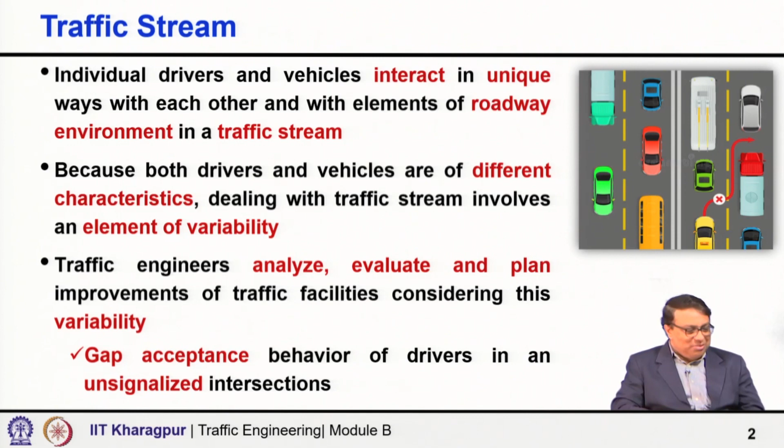Obviously, as the gap is higher, more and more drivers are likely to accept it and fewer drivers are going to reject it. Similarly, as the gap becomes lower, more and more drivers are probably going to reject it and fewer drivers are going to accept it. But given a gap, not 100% of drivers are going to accept that gap, nor 100% are going to reject it. So, the variability comes into picture; not every driver is going to behave in the same manner.

Now, there are fundamentally two types of traffic facilities. One is called uninterrupted flow facilities and the other is called interrupted flow facilities. Please be careful, because students often make mistakes in the fundamental understanding of the basic difference between uninterrupted and interrupted flow facilities. In uninterrupted flow facilities, there are no interruptions external to the traffic stream. What is external to the traffic stream?

If I install a traffic signal to regulate traffic, when the signal is green, the vehicle will pass. When the signal is red, the vehicle has to stop. Or if you are approaching from a minor street trying to enter a major highway or higher order road, and you find a stop sign, you have to stop and then look for suitable gaps. Once you find the suitable gap, you do the maneuver, but stopping is mandatory. Similarly, with yield signs, you have to slow down, and if required, stop when you are trying to enter. These are external reasons for interruption to the movement of vehicles.

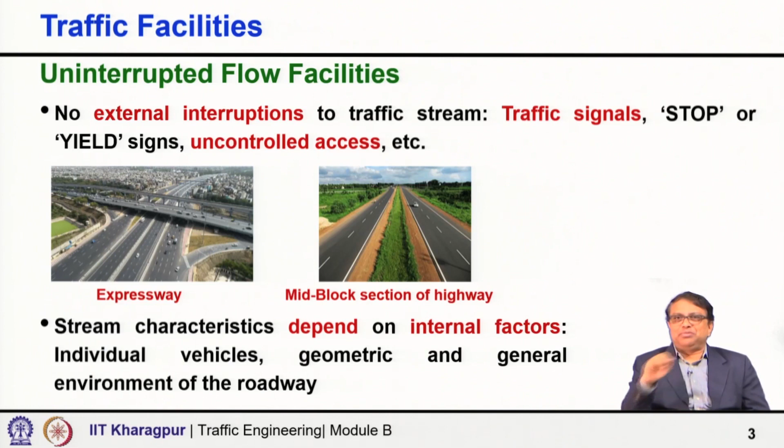Stream characteristics for uninterrupted flow facilities depend on internal factors, as I have said: individual vehicles, their characteristics, driver characteristics, geometric and general environment of the roadway. All this will influence the stream characteristics, but not external interruption. That is the key.

Going to interrupted flow facilities, traffic flow is interrupted due to external factors by external devices, and typically the flow is periodically interrupted by external devices, particularly traffic signals in the urban road network. If you consider urban facilities, all are largely interrupted facilities, because most of the intersections in large urban areas are controlled by traffic signals. So, periodically interrupted by external devices.

Why do I say periodically interrupted? Because when the signal is green, vehicles are passing, moving. When the signal is red, vehicles have to stop, and periodically it is happening: green, red, green, red. So, periodically vehicles are moving and stopping, moving and stopping. And also when stop or yield signs are present, the facility will be treated as an interrupted flow facility.

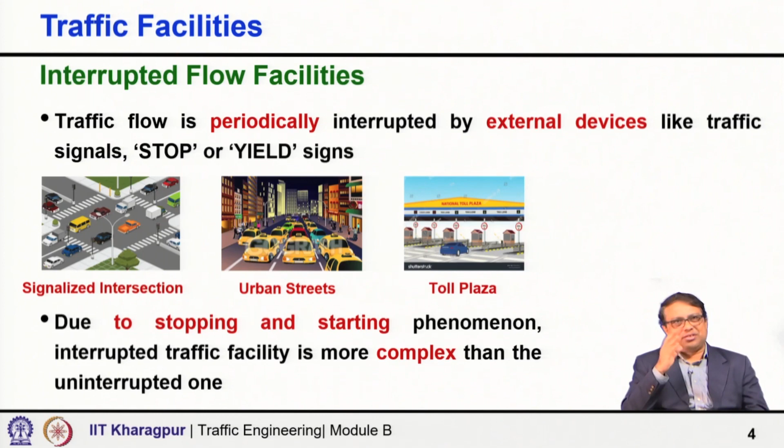So, examples I have said: signalized intersections, urban streets, even toll plazas where the vehicle has to stop and pay the toll. These are all interrupted flow facilities. Now, due to the stopping and starting phenomenon, an interrupted traffic facility is more complex than the uninterrupted one. We shall discuss in further detail the various characteristics of these uninterrupted and interrupted flow facilities.

Coming to next, the traffic stream parameters. There are two types of parameters we deal with. One we call macroscopic parameters, the other we call microscopic. By the names micro and macro, you can understand what we are trying to indicate. Macroscopic means at a gross level, in an overall sense. So, for the whole traffic stream, we are giving one value of the parameter. For example, one speed for the whole traffic stream, one value of the flow, one value of the overall density. These are all called macroscopic parameters.

They are macroscopic because these parameters describe the traffic stream as a whole, and for the whole traffic stream there is one value. Through one value we are representing the traffic stream characteristics. On the other hand, microscopic parameters concern the individual characteristics of vehicles or sometimes pairs of vehicles. For example, individual vehicle characteristics could be speed and acceleration of individual vehicles. They are all individual vehicle specific characteristics.

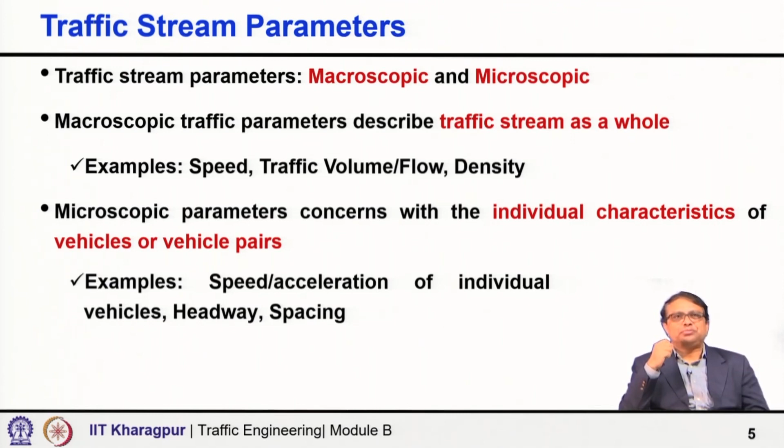Now, macroscopic speed characteristics, if we try to look into a little bit more detail: vehicle groups passing a point or short segment, it could be a point, it could be a short segment that we are also considering almost like a point, during a specified period of time, or travelling along long sections of highway, that means over a length. So, the speed we are trying to characterize, trying to define, is for vehicle groups which are passing a point or short segment during a specified period of time, or over a distance, over a relatively longer section.

Now, speed is considered to be a fundamental measure of traffic performance in a highway system, and also is a key indicator in design or redesign of traffic facilities. Any geometric design of roads starts with the basic input, which is speed. What should be the design speed? So, every element of design is actually done with the design speed in mind. So, a very important parameter. And speed is usually also an input in simulation models.

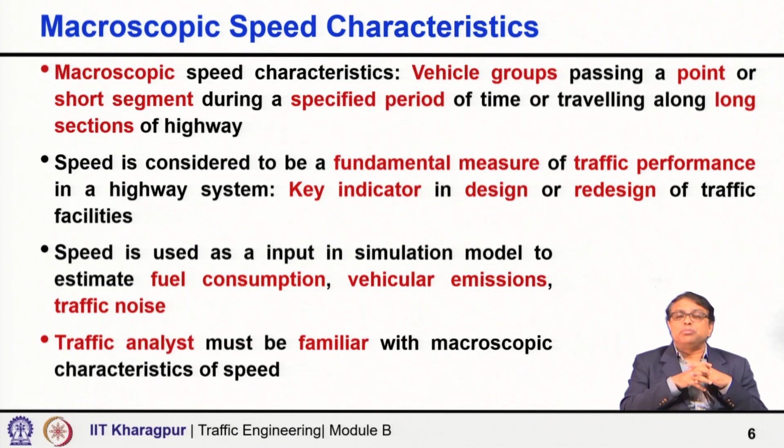We often develop micro simulation models in traffic because of this variability element; to take that into consideration and to analyze complex situations, we often use traffic micro simulation. So, speed is a vital input, and we use such simulation models for estimation of fuel consumption, vehicular emission, traffic noise, and all such things. Traffic analysts must be familiar with microscopic and macroscopic characteristics of speed.

Speed varies. It is not a fixed value; it varies in 3 dimensions or 3 manners. Over the temporal scale, that means over time, and over space, which in this case specifically means location. So, at different locations of the road, speed may be different. At different times, same location, speed may be different. So, 3 types of variation: temporal, spatial, and also modal variation. The same road facility is used by many different types of vehicles, so different vehicle types will have different speeds. A car, a truck, a bus are not going to have the same speed.

Coming to temporal variations, speed varies over time and is influenced by several factors, which we can classify as primary and secondary influencing factors. The primary influencing factors are flow rate or flow to capacity ratio, basically the demand. Any road is a physical infrastructure with a capacity, and the more we load the facility, the more the freedom of movement will be compromised, and obviously, as flow rate gets higher, speed is going to come down.

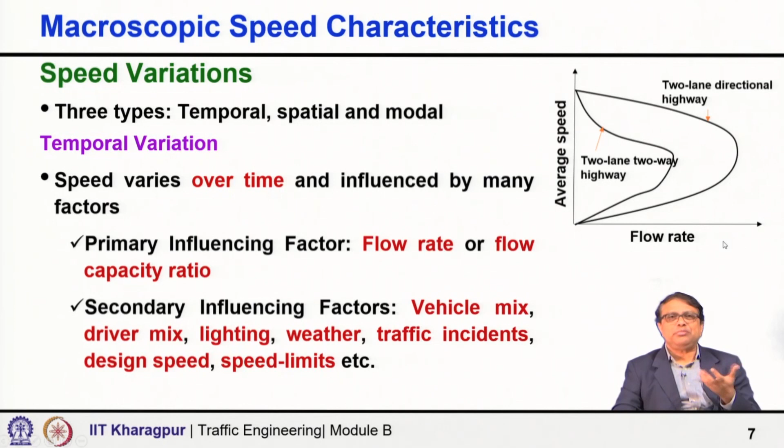And here, as I have shown here, two curves, one for 2-lane directional highway, another is 2-lane two-way highway. Obviously, you can see the maximum flow rate shown here is lower when it is a 2-lane two-way highway. So, that means how much traffic load this 2-lane two-way road can take, the 2-lane directional highway, or if there are even higher order facilities, directional can take even much higher. That is what is shown here.

Speed varies over location, that is what I am saying as spatial variation. So, speed varies transversely across highway and also longitudinally along the highway and also direction wise. Why I say that it varies transversely across the highway? In our case, sometimes things are not really orderly, but if you see the lane wise traffic distribution, ideally the slow moving should be on the left side in the Indian scenario, which is left hand driving, what we follow in India.

So, the slow moving, then the higher speed, maybe the middle lane, if it is 3 plus 3. So, I am talking 6-lane highway, 3 lanes in each direction, and the rightmost lane should be for the fastest vehicle. So, any vehicle you want to overtake, that means you want to travel at a higher speed than the vehicle in front, you should use the available right lane, complete the overtaking maneuver and come back.

So, naturally, in all the developed world also you will find that lane wise speed limits are there, because based on vehicle characteristics, based on driver characteristics, not every vehicle is going to travel at the same speed. Even if the design speed is higher, that does not mean that all vehicles will travel very fast. With a very good vehicle also I may like to travel slowly.

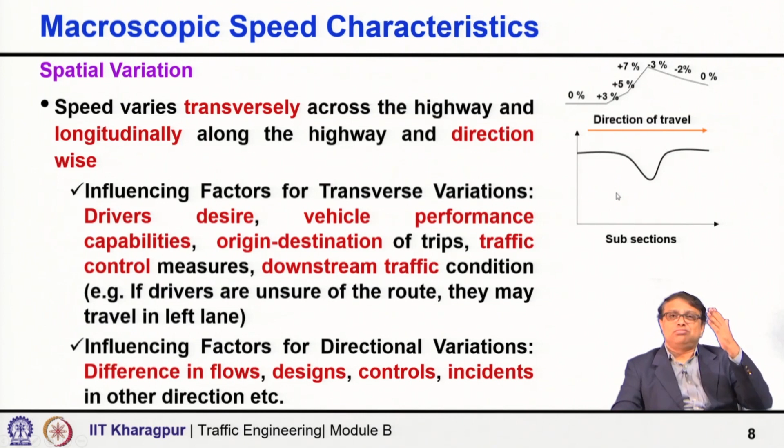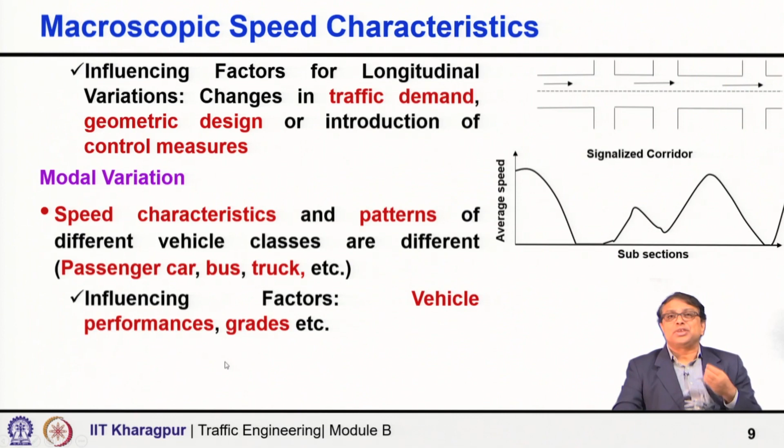Also, there is longitudinal variation along the length. I have shown it in the previous slide. The terrain may be different, the slope may be different. So, along the length of the road, or there could be in between some minor access or other things, the speed may vary. Modal variation also is there, as I have already said. The speed characteristics and pattern of different vehicle classes are different. For example, passenger car, bus, truck, they do not travel at the same speed. So, here the influencing factors may include vehicle performance, grades and all such things.

Now, it is important to understand the mean variance relationship. Why? Because there is an element of variability. That variability is part and parcel of traffic engineering. So, as speed variations are observed in the field, it is necessary to quantify mean and variance, and here we use the term called coefficient of variation, and it is a measure of dispersion and normalizes standard deviation.

So, how do we express CV, the coefficient of variation? It is S by mu. S is the standard deviation of the speed sample, and mu is the sample mean speed. So, you will see that there are different CV values, but different combinations of the standard deviation and sample mean may give you the same CV value.

So, I have shown different lines here. Here the CV is 0, that means the standard deviation is 0. And as you move in this direction anti-clockwise, the CV value becomes higher and higher. And any point on these lines shows that the same CV can come from different combinations of S and mu.

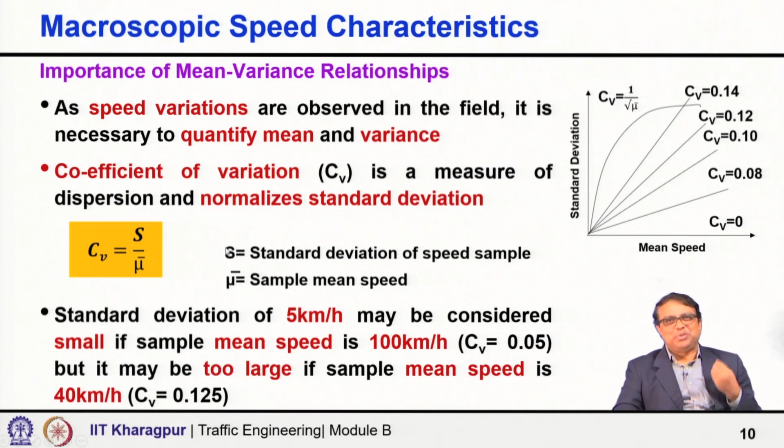So, it is not only the standard deviation, but standard deviation by mean, what we normally refer to as coefficient of variation, that is important. So, based on that we can judge. An analyst can estimate speed distribution by selecting an expected mean speed with a particular CV value to get the standard deviation and assuming a normal distribution. Speed varies, and we often express such variation using the normal distribution. Not that only the normal distribution is applicable, but often we assume it to be normally distributed.

Now, when we talk about average speed, there are two ways we can express speed. One is called time mean speed, the other is called space mean speed. Time mean speed is the average at one point or location over a period of time. So, at one location I have observed the speeds of multiple vehicles over a period of time, and mathematically it is the arithmetic mean of the speeds observed at a point.

On the other hand, the other expression of speed is called space mean speed. It is the average speed of vehicles occupying a certain road length over a period of time, and mathematically, if you express it, you will see that it is the harmonic mean of the speeds observed at a point.

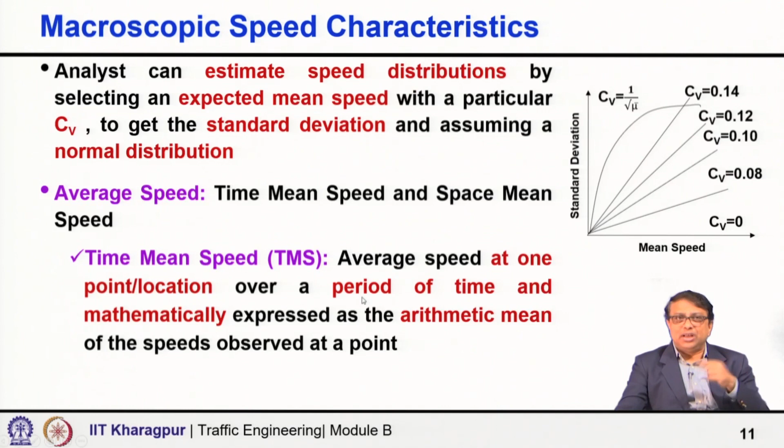So, I have shown here that 25 spot speed observations were made at a particular location. So, I have observed 25 vehicles and their speeds. So, what is the time mean speed? Time mean speed is the average of speeds measured over a period of time. So, I simply take the average, 50 plus 40 plus 60 and so on, divided by 25, and I get 49.56 kilometer per hour.

Now, suppose we consider each of these 25 vehicles traveling a distance d, and over that distance each of them maintains the same speed. That means the first vehicle travels distance d maintaining 50 kilometer per hour. Then how much time has that vehicle taken? It is basically distance by speed. Second vehicle, again distance by speed. Like that, you can calculate the time for each individual vehicle.

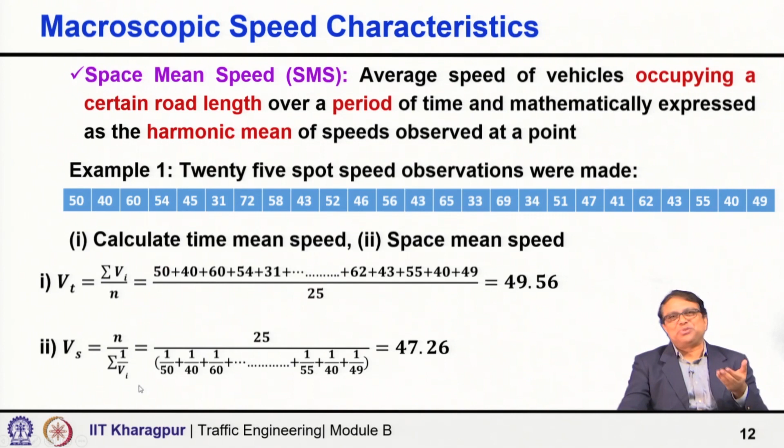What is then the average time? 1 by n of d by 50 plus d by 40 plus d by 60 and so on. Then what is the average speed over that length? It comes down to this expression as I have shown here. And what you observe here is that the space mean speed is lower than the time mean speed. In fact, for all practical purposes, unless all vehicles are travelling at the same speed, you will always get the space mean speed lower than the time mean speed.

Let me take up another example to explain this further. Suppose n and 2n vehicles are travelling at speeds of 20 meter per second and 10 meter per second respectively in lane A and lane B. So, this is lane A, this is lane B, and here every vehicle is travelling at 20 meter per second, and in lane B every vehicle is travelling at 10 meter per second.

So, if an observer is standing by the side of the road, somewhere here, trying to record the number of vehicles crossing, then one vehicle will pass every 5 seconds for both lane A and lane B, because here it is 20 meter per second.

So, what will you get? Every 100 meters here, 100 by 20. So, every 5 seconds you will observe one vehicle, and here in lane B also, 50 by 10, every 5 seconds you will observe a vehicle. So, both in lane A and lane B you will observe a vehicle at a 5 second interval, every 5 seconds one vehicle. Thus, the observer will see the same number of vehicles at any instance of time in both the lanes.

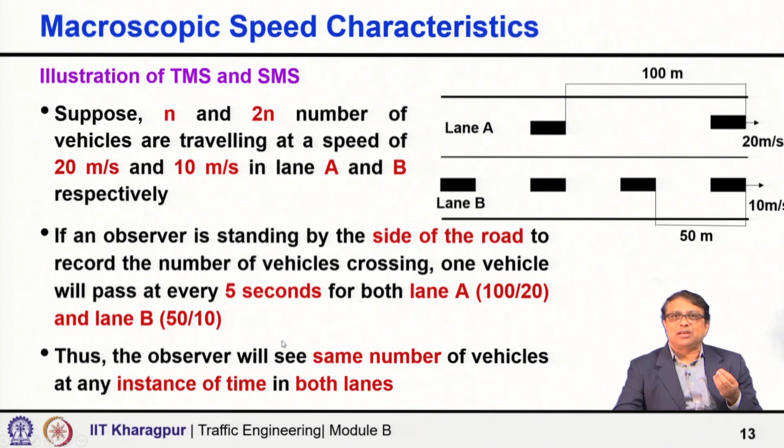So, SMS is actually always lower than TMS, because TMS gives equal weight to all vehicles. In the first case, when we calculate TMS, 20 into n plus 10 into n, equal weightage. Here also n, here also n. But when we are doing SMS, more weightage is given to slower vehicles in the traffic stream, because here you can say 20 into n plus 10 into 2n.

So, SMS is lower. Now, what will happen if all vehicles, whether you consider one lane or multiple lanes, are travelling at the same speed? Then you will get the same value for TMS and SMS. But that is unlikely to happen in reality, because all vehicles will never travel at the same speed, there will be differences, and therefore, if you take and analyze any real data, you will find SMS will be lower than the TMS.

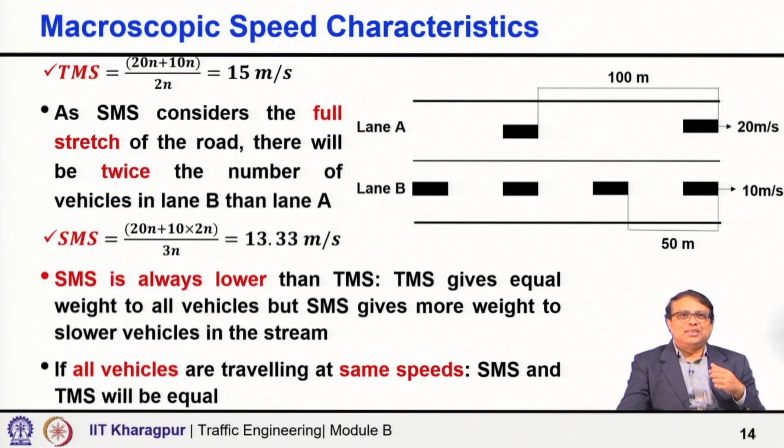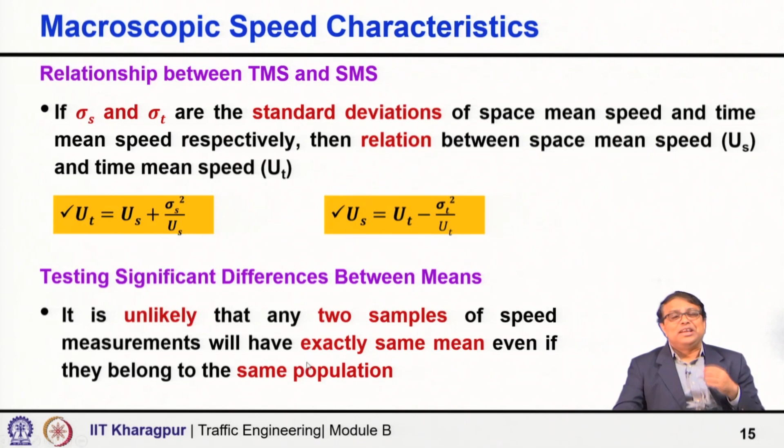Now, one question may come up: when we take samples of speed measurements, we do not measure the speed of every vehicle, right. So, if we take two separate samples, it is unlikely that the two samples of speed measurements will have exactly the same mean, even if they belong to the same population. But then are they different? So, here some knowledge of statistics can be utilized to investigate such things.

Although knowledge of statistics is not a prerequisite for this traffic engineering course, and I neither expect nor will be able to go into much detail on each and every aspect of the basic knowledge required in statistics, some of the things I will mention very quickly. Those who already know the basic elements can relate very easily. Others, if you want to know more details, can refer to any standard book, or take a course on basic statistics.

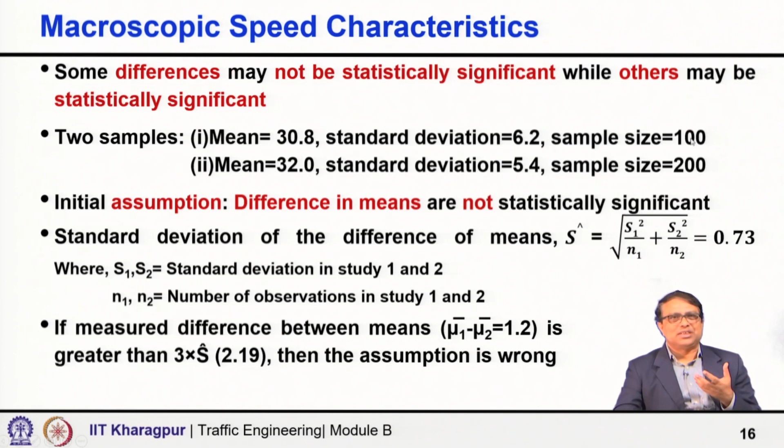Some differences may not be statistically significant. So, the numbers may always be different, but are they statistically significantly different? That we need to judge. So, let us consider you take two samples from the same population. In one case the mean is 30.8, 6.2 is the standard deviation, and sample size is 100; in another case the mean is 32, standard deviation is 5.4, and sample size is 200.